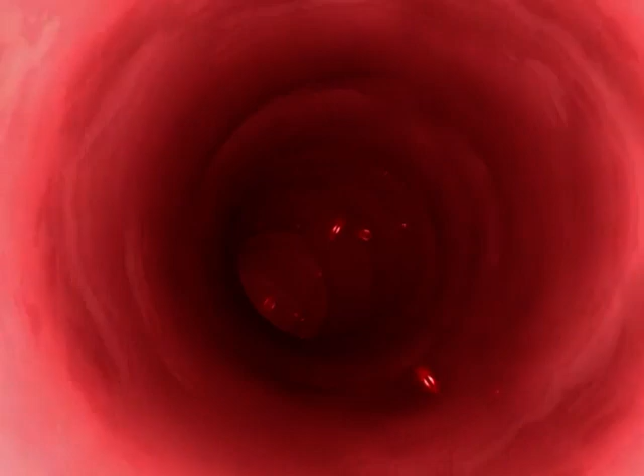Today, almost a century after Bauhaus, we have started an unprecedented attempt for design for the extraordinary: life. Now in the 21st century, demand for design for the extraordinary is increasing at a remarkable rate. Design for the extraordinary is artifact design for use under extraordinary mechanical constraints.

For example, the design of deep-sea submergence vehicles, or micro-robots that operate in blood vessels. Can someone design an appropriate artifact for the extraordinary? Life, one of the keywords of the 21st century, is the subject for this design for the extraordinary.

At present, many advanced research institutions and scientists all over the world have shifted their interests to fields more related to life, such as biology, medicine, and welfare. Research of artifacts and systems related to life will be the main focus of the 21st century. Therefore, design for life will undoubtedly become one of the main subjects for design.

Are conventional design methods applicable in such situations? In the past, design has mainly been divided into two types: design that originated in Bauhaus, and engineering design that has shown remarkable progress during the latter half of the century. However, neither can fulfill what is required of design for life.

When designing for the extraordinary, life is required. It is a challenging quest to come up with and evaluate adequate design solutions using existing design methods. Design for life is difficult from both design and engineering viewpoints, and is in itself another type of design. We are now facing a new design phase, and must pace towards another type of design.

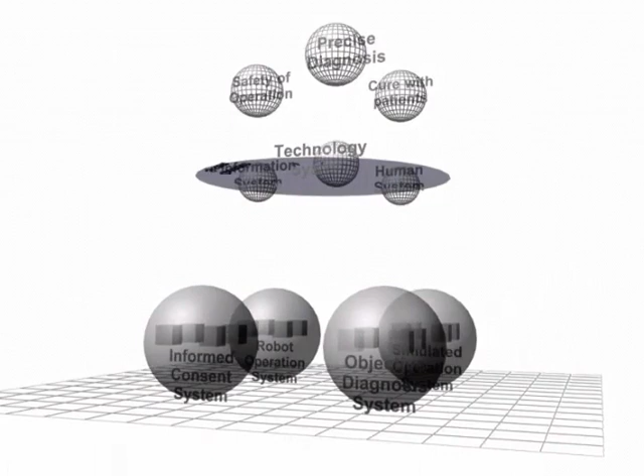Interaction is a major feature of biological systems, and integrating interaction and hierarchy is critical in formalizing a novel medical operation system. This is the flow of the whole system. The main features are concerted medical service through informed consent and simulation-based laparoscopic surgery.

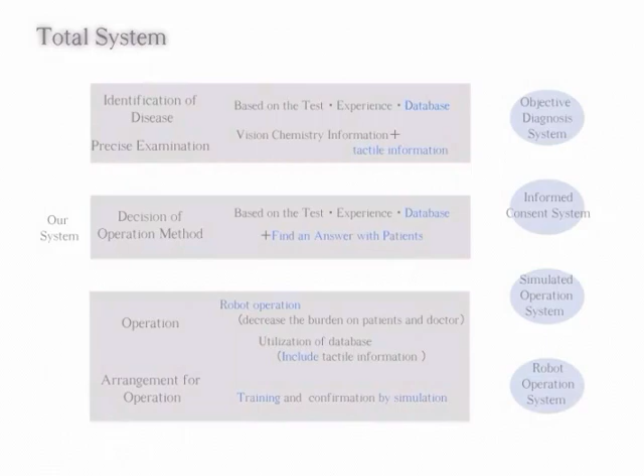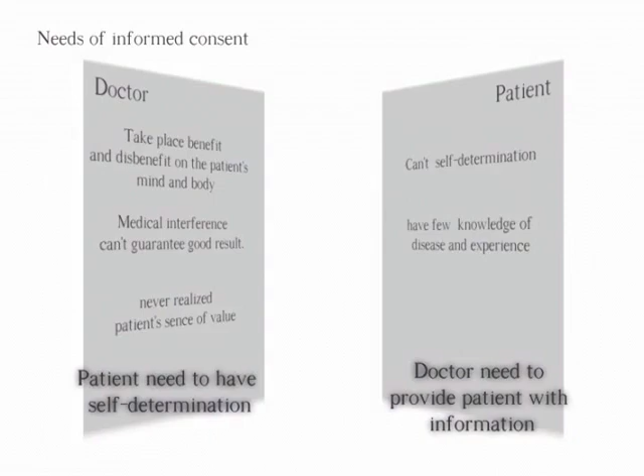As for the informed consent, at present, the patient is not fed enough comprehensible information, thus unable to actively participate in choosing the treatment. Our system explores ways for concerted medical service, in which the patient can make their own decisions with the support of doctors. The patient will be provided with easy-to-follow information through 3-dimensional modeling, use of database, and large LCD screens.

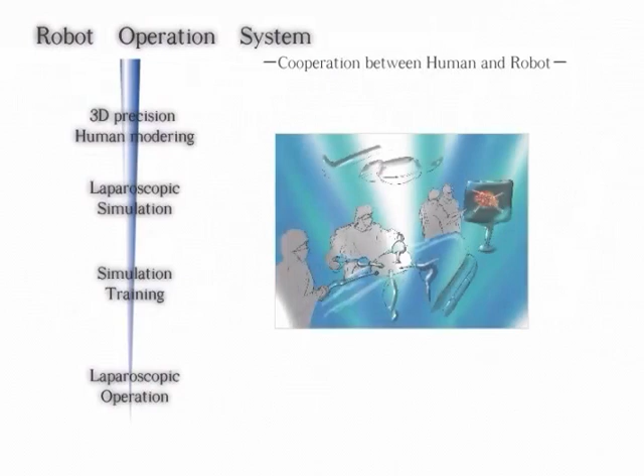Simulation-based laparoscopic surgery: laparoscopic surgery requires extremely high technical skills, and lack of experience can lead to fatal accidents. BIMOS allows the doctor to train and practice through simulation, using information obtained from past surgeries and 3D modeling of the human body. With enough time to prepare for a surgery, reliability of the whole system will greatly improve.

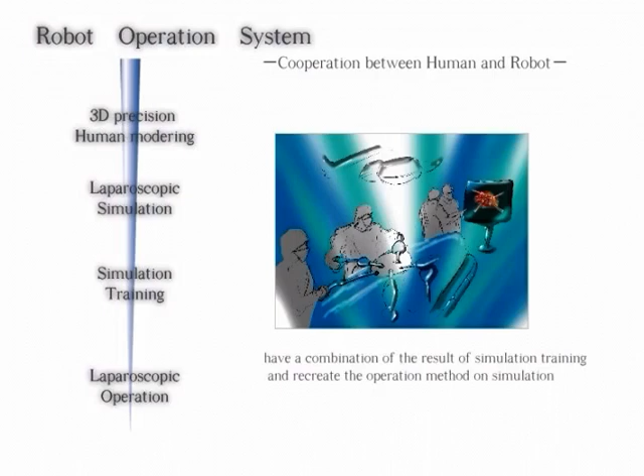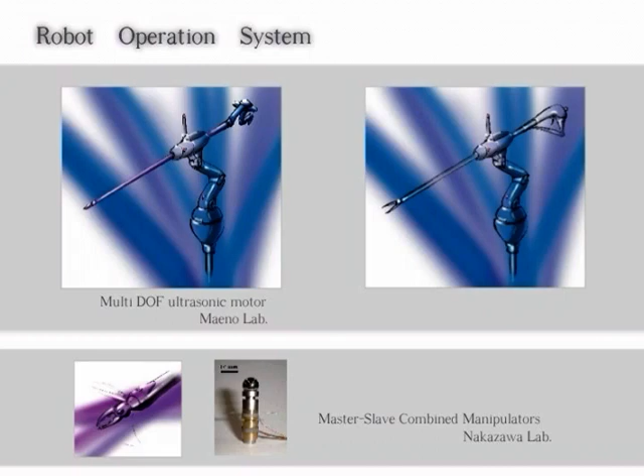The hierarchical design modeling method, a technology still under development at Keio University, was implemented in designing the proposed surgical robot. Other technologies such as the master-slave combined manipulator and effectors using multi-DOF ultrasonic motors are also some of the new technologies introduced. Simulation and surgery will be conducted, taking advantage of these developing technologies, and will lead to producing new values.

This group proposed a novel surgical system, BIMOS, a biologically inspired medical operation system, integrating the interaction of surgical systems and the hierarchy of technical systems.

Our work is on a life support vehicle for two. We propose a traveling vehicle, a life support vehicle, for the elderly and challenged people. We set out to make their lives more active and satisfactory. We designed a vehicle car that supports the journey, and a vehicle chair that supports activity at the destination.

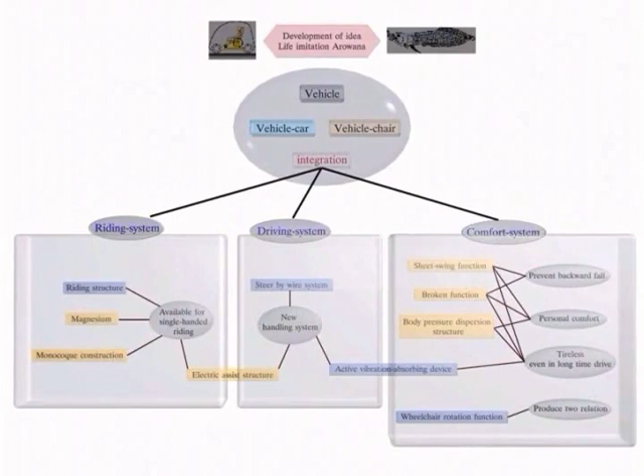In designing the vehicle, we were inspired by creatures that bring up their infants in their mouths. The vehicle is composed of three systems: a riding system, a comfort system, and a driving system. With these three systems, we developed a life support vehicle for two, through collaboration between the vehicle car and vehicle chair.

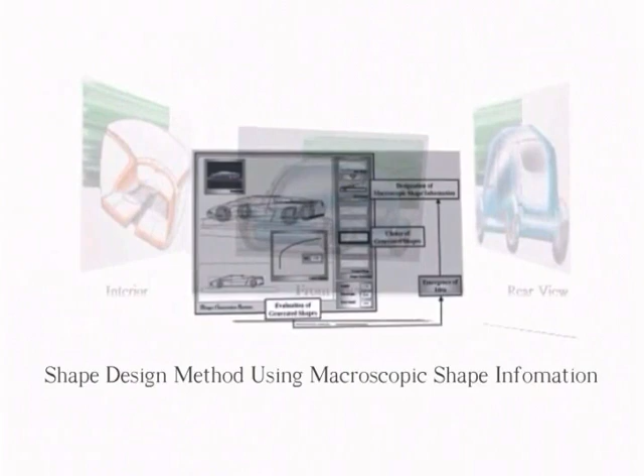These are the exterior and interior design of the proposed vehicle car. In designing it, we use the shape design method using macroscopic shape information, a digital design method under development at Keio University. This method helps create ideas of shapes easily. Using this method, we propose a way of styling a life support vehicle.

Next, this is the design of the vehicle chair. In the vehicle car system, the person rides on a wheelchair and can drive the car while remaining seated on it. The difficulty of getting on and off the car is eased by making the front and rear open. The driver may get on the vehicle from the rear and get off from the front. To handle a vehicle car in the same way as handling a wheelchair, we applied a by-wire system.

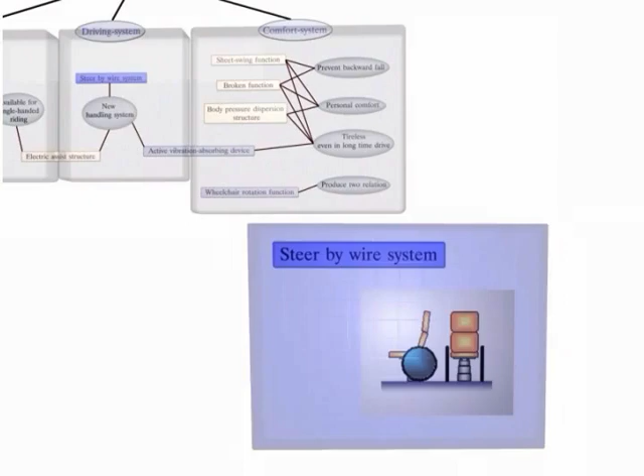When handling a wheelchair, vibration greatly affects comfort. Therefore, our system makes use of an active vibration control system, also currently being developed at Keio University. In addition, we propose the structure of rotating seats for the vehicle car, suitable for the concept of a life support vehicle for two.

We also propose a broken structure, a seat swing structure, and a pressure dispersion structure to reduce fatigue and make time more relaxing for the two people on long-distance journeys. Future issues would be the verification of effectiveness when using a combination of these technologies.

Our project is on an artificial joint system interacting with organisms. We would like to propose an innovative artificial joint system under the concept of interaction between implant and organisms, viewing artificial objects and organisms from multi-aspect and integrated points of view.

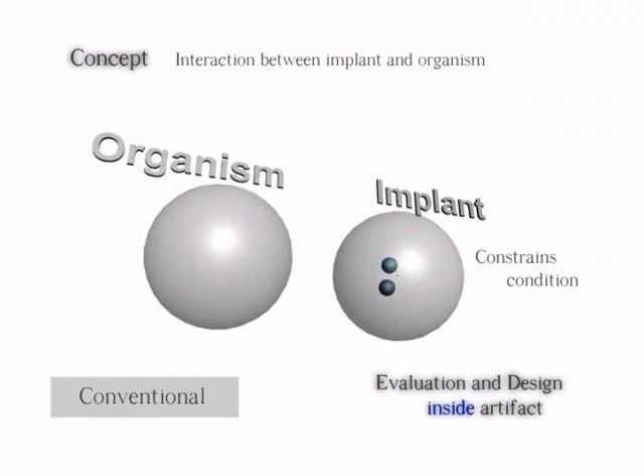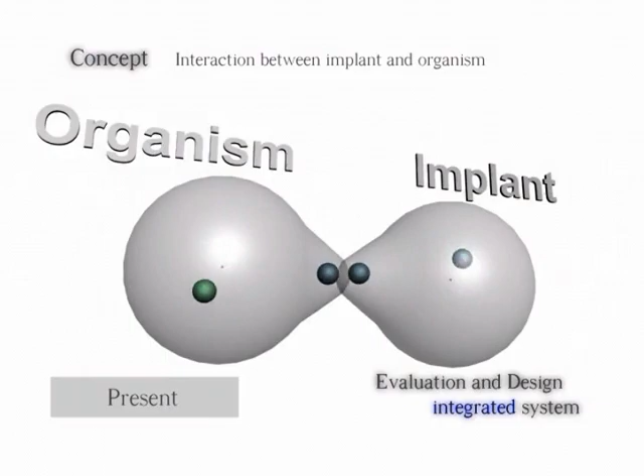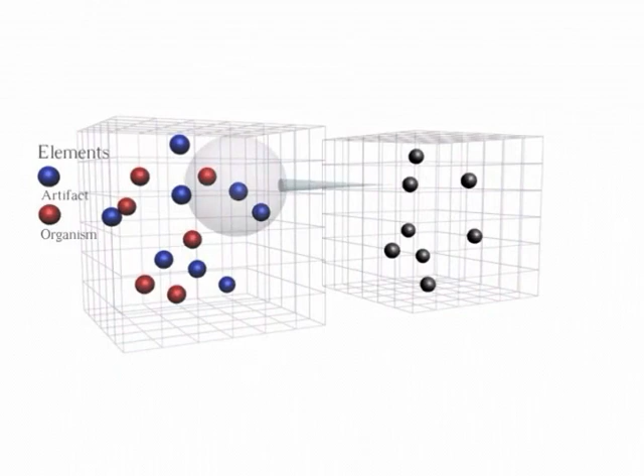In designing conventional artificial joint systems, the factor of organisms has been considered a constraint, and we need to evaluate whether the implanted materials satisfy the constraints. However, in our system, the material interacts with the organism and external devices, and constraints such as the surrounding environment can be eased. To realize our concept, we needed to add the organism as a component in the solution space, and to map from the meaning space to the solution space. As a result, the organism becomes one of the variables in designing the system.

The hip joint is the subject of the system. First, we organized hierarchical meaning components necessary for an artificial hip joint using QFD and ISM. In addition, we found technologies from macro, meso, and micro scale points of view, and introduced them into the proposed system.

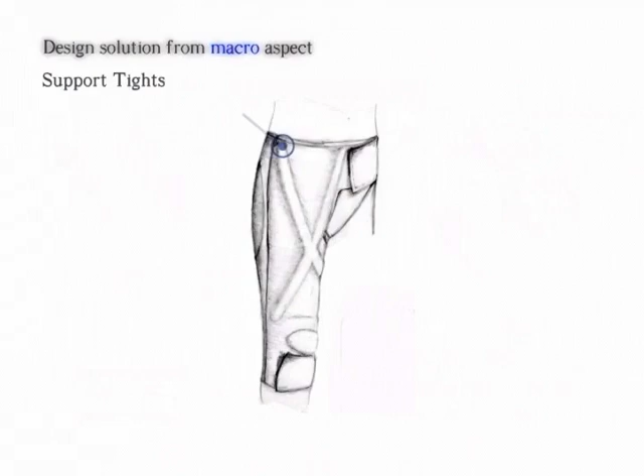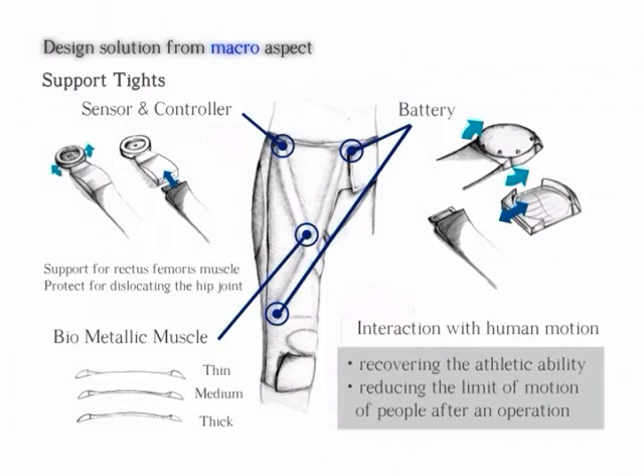From a macroscopic aspect, we propose supporting tights for recovering athletic ability and reducing motion restrictions of patients after operation. This actuator-embedded supporter works synchronously with the motion of the human body, and we expect it can be worn for some time after the operation.

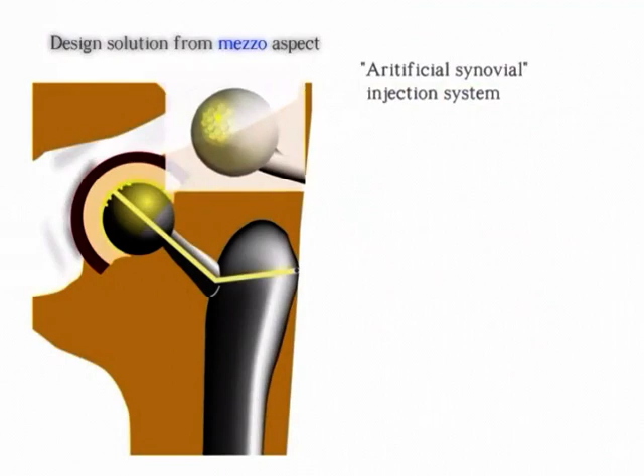From a meso aspect, we propose a fluid injection system to improve tribology characteristics of the sliding part, substituting the lubricated body fluid of conventional devices and reducing wear of the joint.

We also propose an optimized stem form using an emergent form generation system. This system consists of a generation process and an optimization process. In the generation process, induction and apical dominance, two properties of organisms, are imitated to generate diverse forms in a self-organizing manner. Here is the process of form generation.

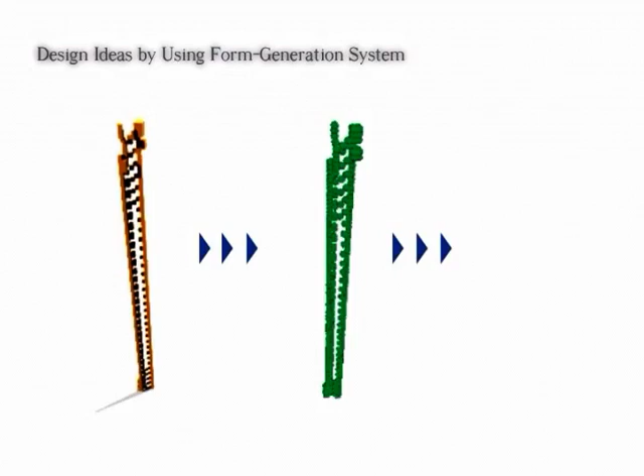In the optimization process, forms are optimized while maintaining the diversity and features of the forms obtained in the generation process. The results show that the system can obtain diverse topological structures.

These figures show examples of design ideas. The results show that unprecedented stem forms were obtained by the proposed system.

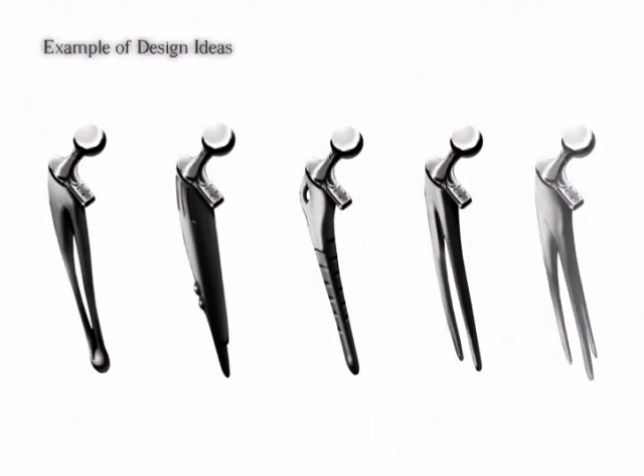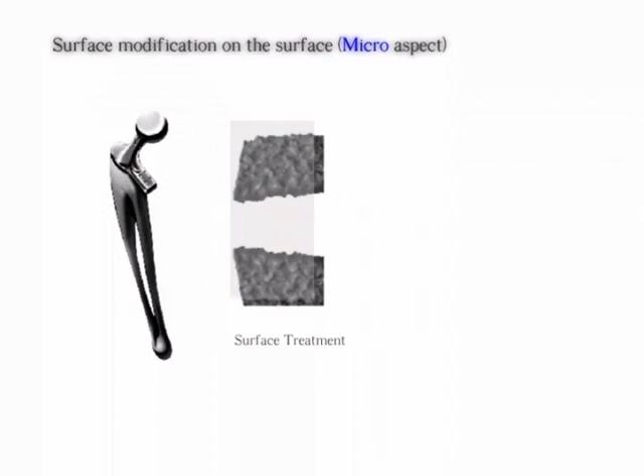From a microscopic aspect, the stem surface is subjected to fine particle bombardment, FPB treatment. FPB treatment is a newly developed surface modification process in which fine particles are bombarded onto the surface at very high velocity, creating microtexture on the treated surface.

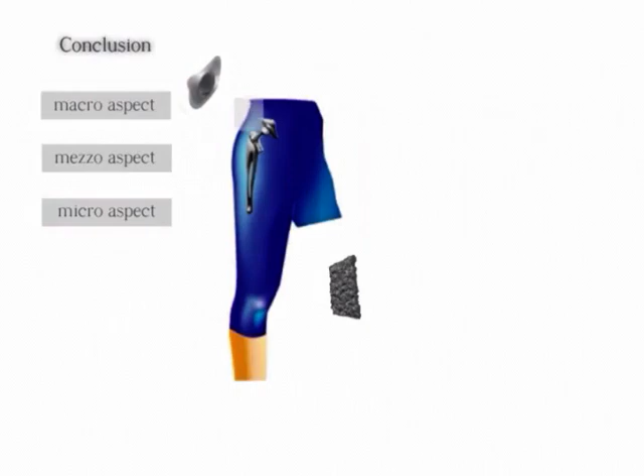In conclusion, we proposed an artificial joint system that improves the quality of life of patients with fine biocompatibility and reliability, by realizing a new meaning of interaction between implant and organisms.

Our Advanced Design School was a four-month activity from April to July 2004. This was an unprecedented attempt, and the accomplishments are yet to be concluded. However, we believe the continuance of the school is of paramount importance in order to design for the extraordinary. Life is another type of design.